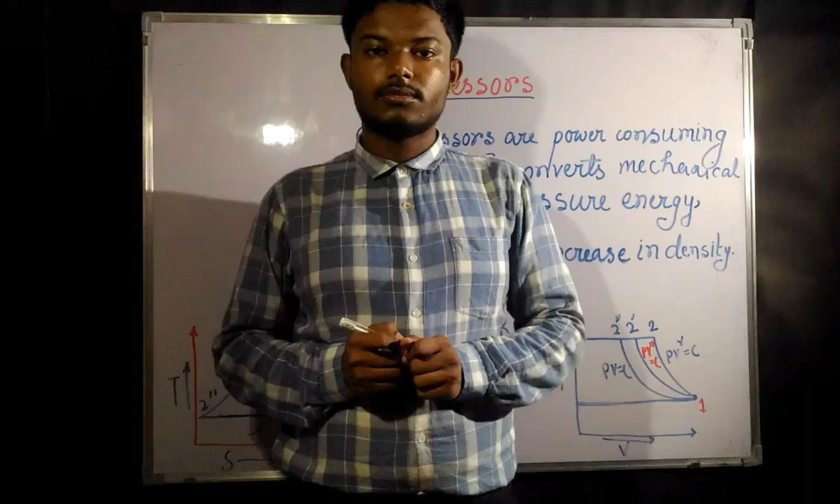In this lecture we are going to start compressors.

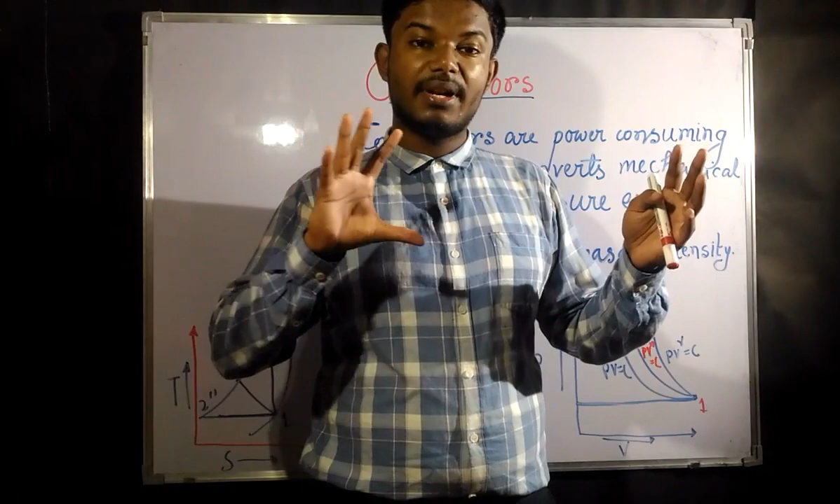So what is a compressor? Compressor is an open system device, a power consuming device which converts mechanical energy into pressure energy, with appreciable increase in density. So what does the compressor do? It compresses air or whatever substance with the help of mechanical energy, such that the volume is reducing, resulting in increasing density. Due to this forceful compression, the pressure energy gets raised. So such devices are known as compressors.

Now compressor is an open system device. If you remember the work done formula for open system devices, it goes like this: W open equals minus of integration of V into dP. This was the formula for our open system.

Now there are five possible ways, or five possible processes. What are these processes? They are constant pressure, constant volume, adiabatic, polytropic, and isothermal.

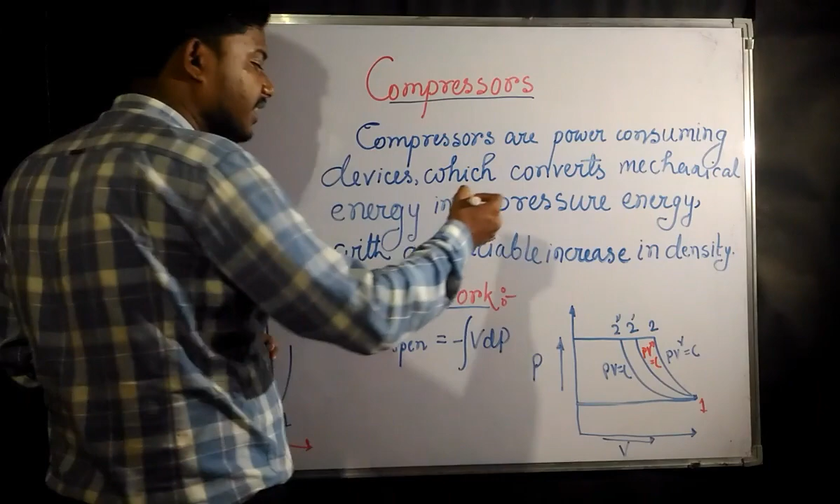There are five processes, but out of them you cannot go for the constant volume process, and you cannot go for the constant pressure process. Why? Because in the definition itself it is written that mechanical energy is converted into pressure energy, meaning there should be a rise of pressure during this process. So you cannot go for constant pressure process. If you go for constant pressure during compression, then the whole work would be in vain.

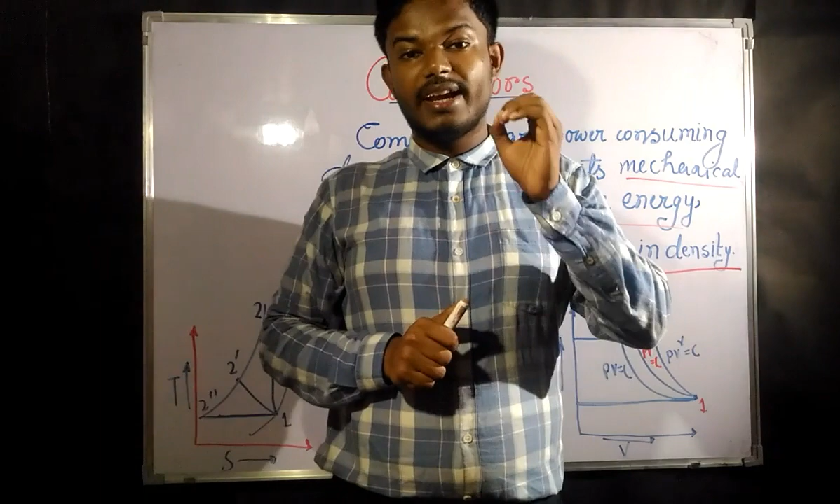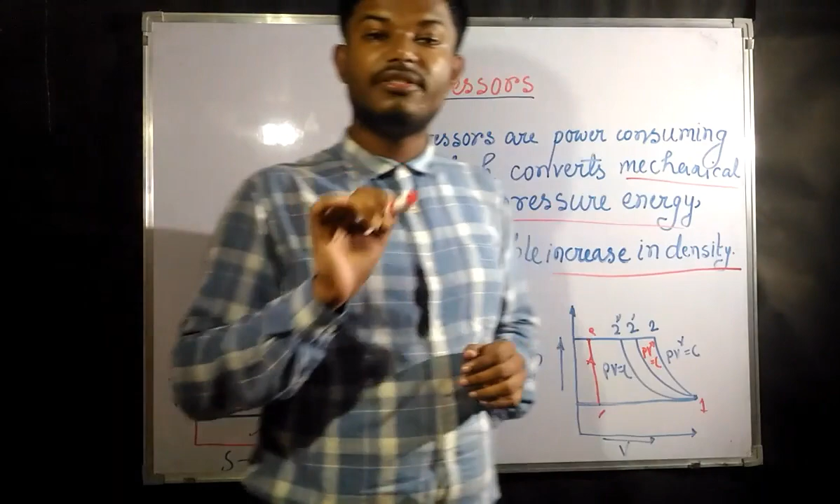Now the second thing is constant volume process. You cannot go for this either, because in constant volume process there would be no increase in density. If you do not decrease the volume, your density is not going to increase. By rising the temperature you can increase the pressure, but the density is not going to increase, so whenever it cools down, it will come back to its original pressure. From 1 to 2 you can rise the pressure this way, but that would be in vain, because if the temperature comes down, the pressure will also come down, and it is not going to increase the density.

So what are the remaining three processes? They are nothing but adiabatic, polytropic, and isothermal. From 1 to 2 is adiabatic process, from 1 to 2 dash is polytropic process, and from 1 to 2 double dash is isothermal process. Now, as we have seen earlier, let's look at how the slopes are going to be in case of these adiabatic, polytropic, and isothermal processes.

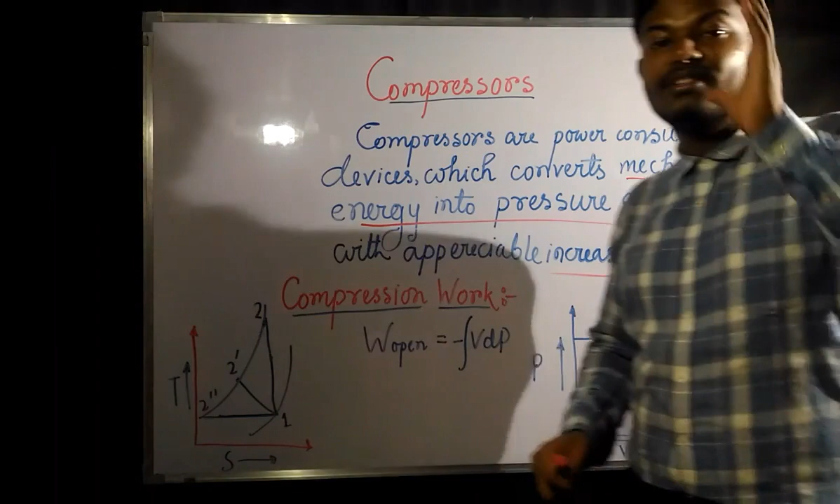Now you can see we have always said this for open system work. In closed system work, what happens? Whatever curve is there for closed system, if you project it onto the volume axis, then whatever area that is given, that is our work done by a closed process.

Okay, now in case of open system, this is going to be an open system. Compressor is an open system. So I have also said that for open system, what is the total work done, or how can we find the total work done from the diagram? It can be found if you project the curve. If you project the curve on pressure axis, for closed system you project it in volume axis, and for open system it is going to be projected on the pressure axis.

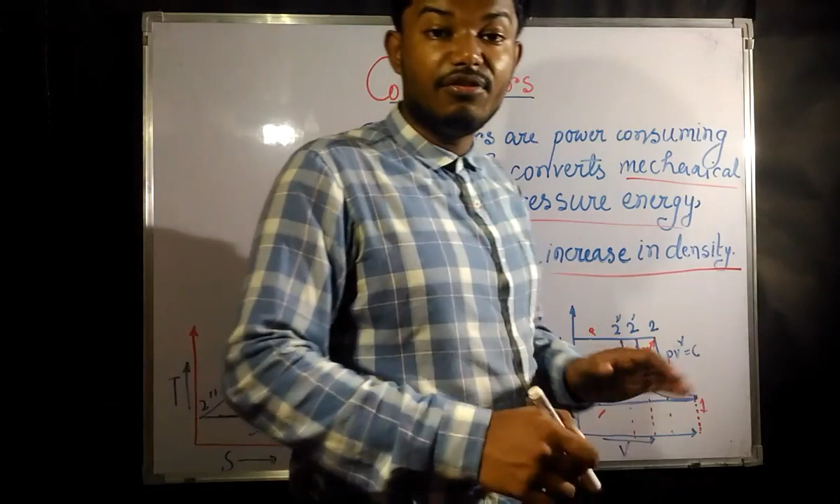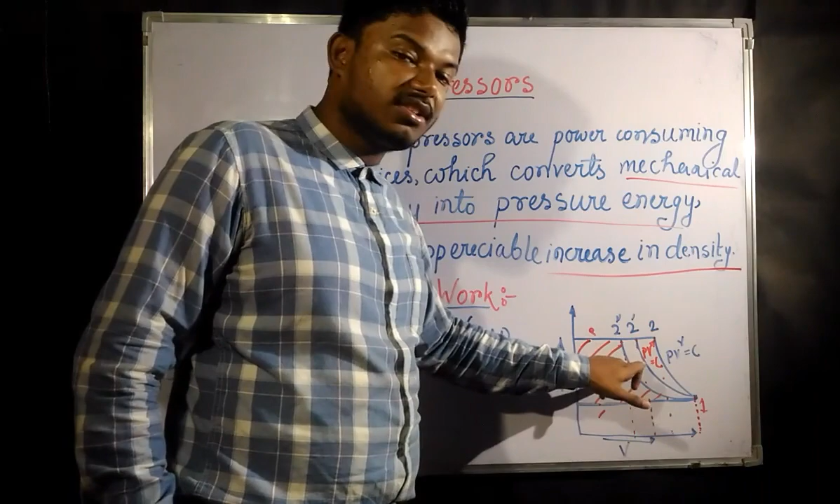Now if you project the slope on pressure axis, then whatever area it covers gives us the work done by the open system. So from this diagram you can easily say, this is adiabatic process from 1 to 2, 1 to 2 dash is polytropic, 1 to 2 double dash is isothermal. Now you can easily say, if you project each and every curve on the pressure axis, then which process is going to have the lower work done.

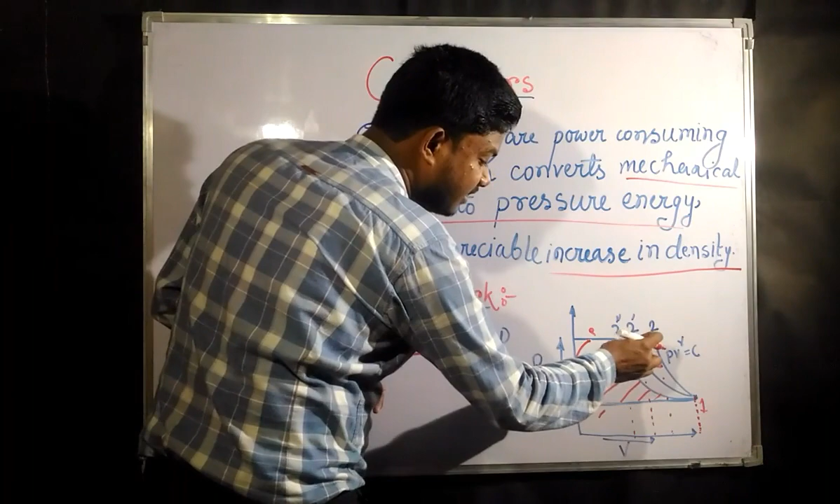Lower work consumed, or the amount of work interaction, which curve is going to give you the lowest amount of work interaction, that is only the 1 to 2 double dash. That means the isothermal process, 1 to 2 double dash is isothermal process. This is only going to give you the lowest amount, because if you go for 1 to 2 dash, this much of area is going to increase, and if you want to go for adiabatic process, then this much of area again going to increase.

So the lowest amount, this is compressor. So this is going to be work consuming device. That means the lowest amount of work that should be given to a compressor so that it can perform can only be possible in isothermal process. That means if you go for isothermal process, then only the work given to a compressor is going to be less. But we cannot go for isothermal process, as well as we cannot go for the adiabatic process also.

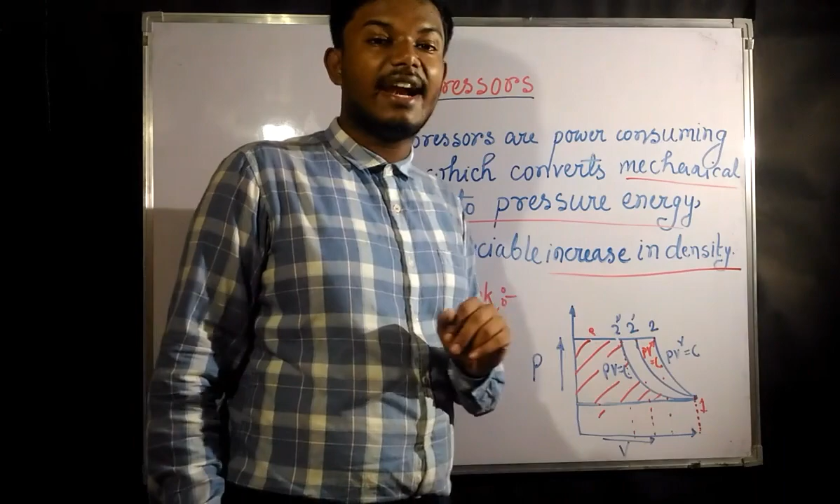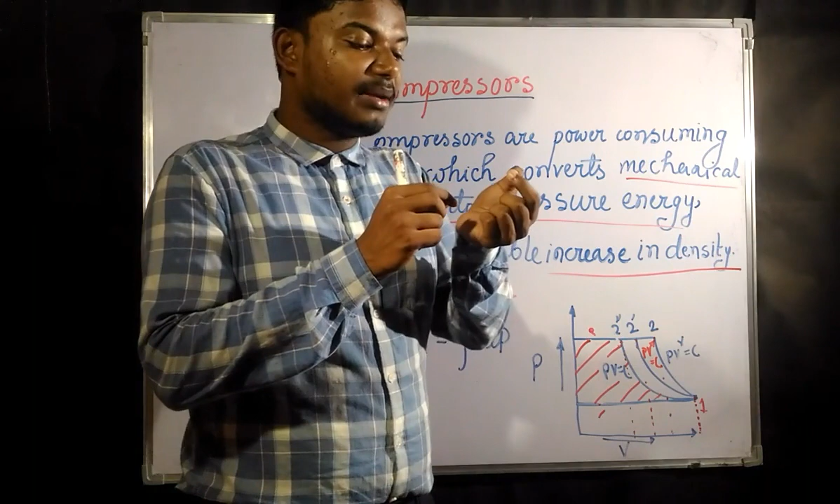Why? Because practically isothermal process is very slow process. Why is this slow process? Because if you give some heat, slight temperature difference would be there. Now you will have to wait for the temperature to come, that slight increase in temperature to come to its original position, then you are giving more heat. So that the temperature is again going to some extent, then again you will wait to take it to the original temperature. Then after that you are going to give it, then also some more increase in temperature will be there, then you will wait for it to come down to the same temperature, and like this your process will be going on.

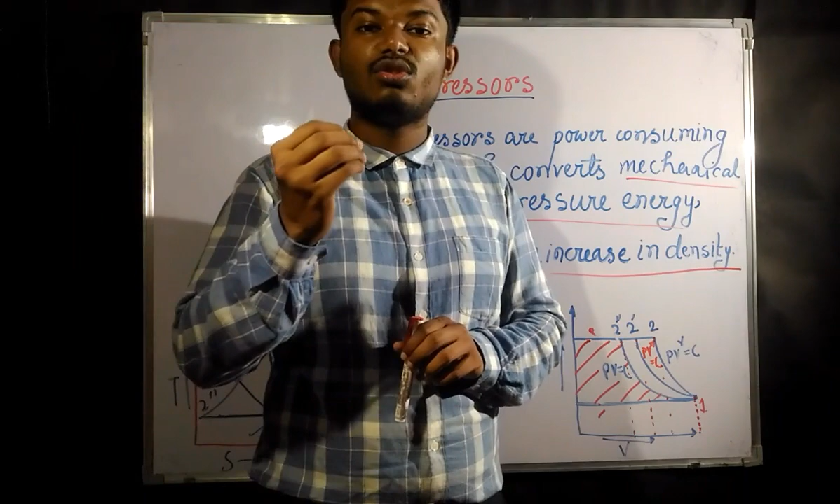So it is a very slow process. Isothermal process is very slow process, because you are constantly reminding that you are not allowed to increase the temperature. So for this reason we have to add the heat slowly, so this is going to be a very slow process. And in case of adiabatic process, what happens? Adiabatic process is a very fast process. You have to do the process in such a short time that it does not get the time to interact with the surrounding. If there is interaction with the surrounding, there must be some heat interaction.

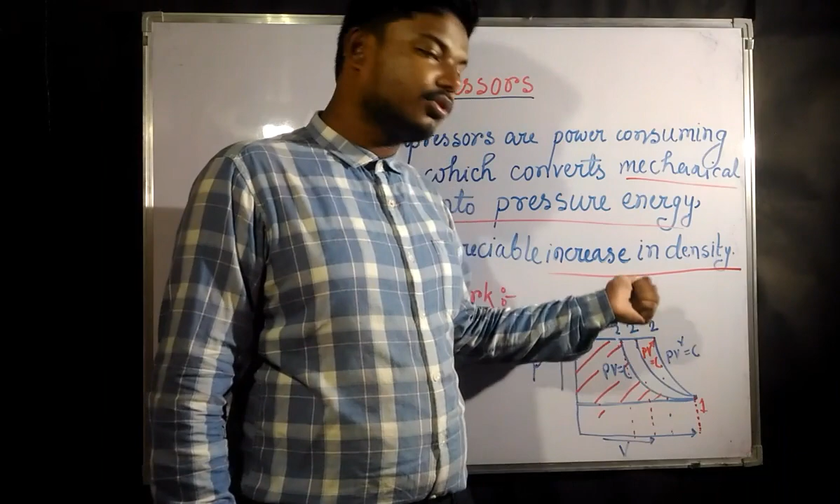So adiabatic process is a very fast process, and isothermal process is very slow process. So the only process that we are remaining with is going to be our polytropic process, and since this polytropic process lies between these two, this is neither very fast nor very slow. So only with polytropic process we can perform the compression process. So this is our three processes in PV diagram.

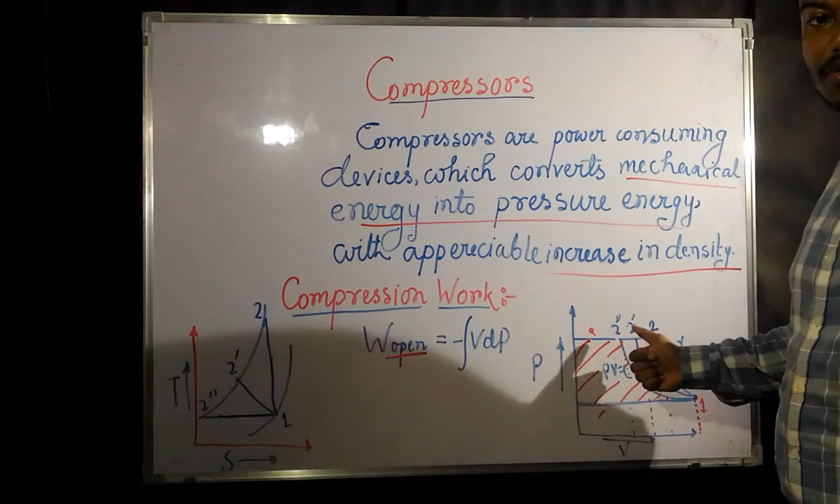Now coming to the TS diagram, or temperature entropy diagram. In this diagram, 1 to 2 is adiabatic process. That means adiabatic processes are always isentropic process. So here, keeping the entropy same, 1 to 2 it is getting compressed.

1 to 2 dash. 1 to 2 dash is what? 1 to 2 dash is polytropic process. And 1 to 2 double dash is what? Constant temperature process, or isothermal process. So 1 to 2 double dash is constant temperature process. So this is parallel to the entropy axis, and since this is isentropic, this is going to be parallel to the temperature axis. And in between them there is going to be the polytropic process.

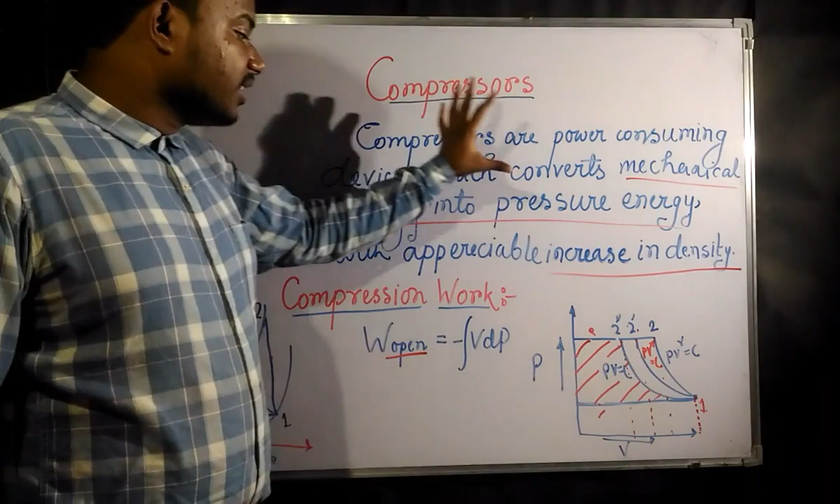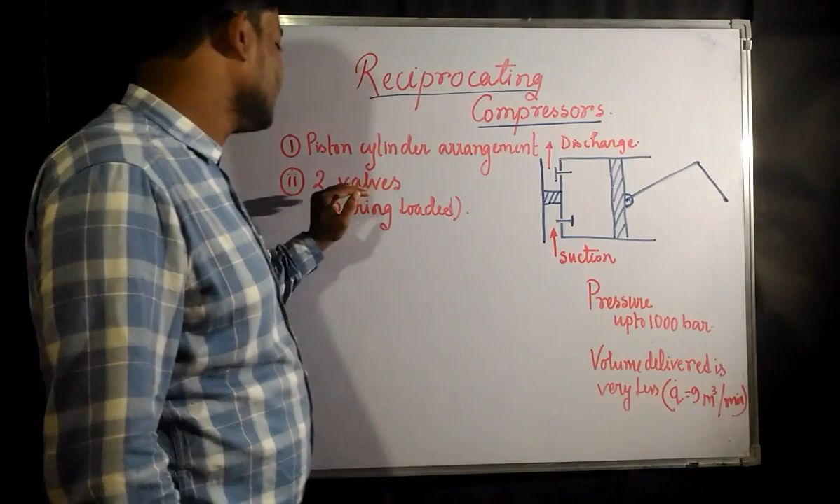Now it is constructed with two different parts. One is the piston cylinder arrangement. There must be one piston cylinder arrangement and there must be two valves, and these two valves are going to be spring loaded. Spring loaded means they open and close, connected with springs.

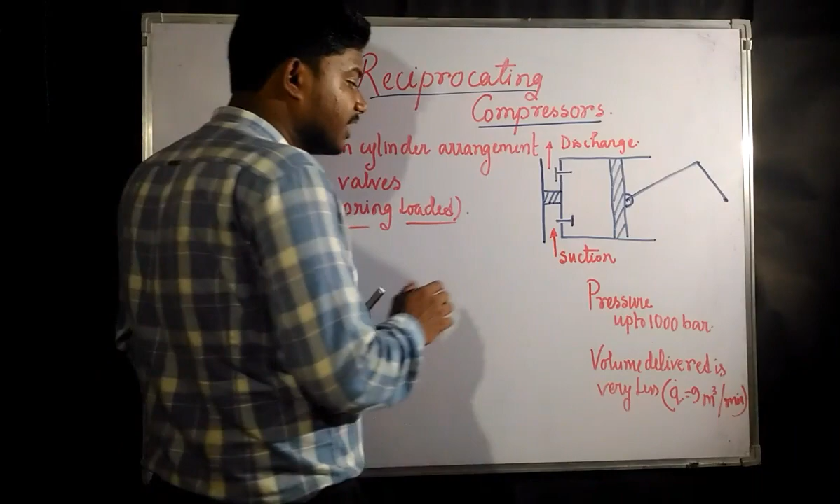Whenever there is a pressure difference across these valves, then only these valves are going to open or close. During suction, the piston is going to go towards the outside of the cylinder. That means there would be a suction created inside this cylinder. Now after the suction creation, this is open to air.

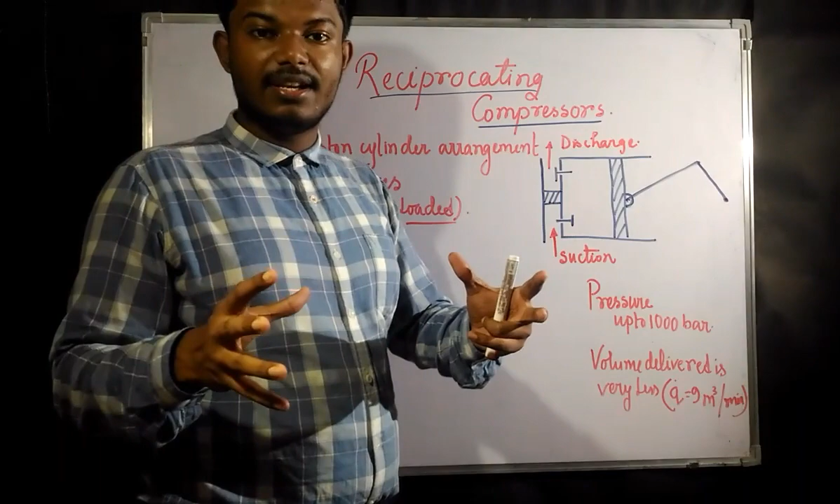This part is open to air, or whatever the gas we need to compress, at whatever pressure that gas is kept. Suppose we need to compress oxygen, and this oxygen is kept in a cylinder with direct connection to this suction pipe of the compressor. So whatever the pressure P0 is given here, that would be the pressure outside this valve, and inside this valve there would be one negative pressure.

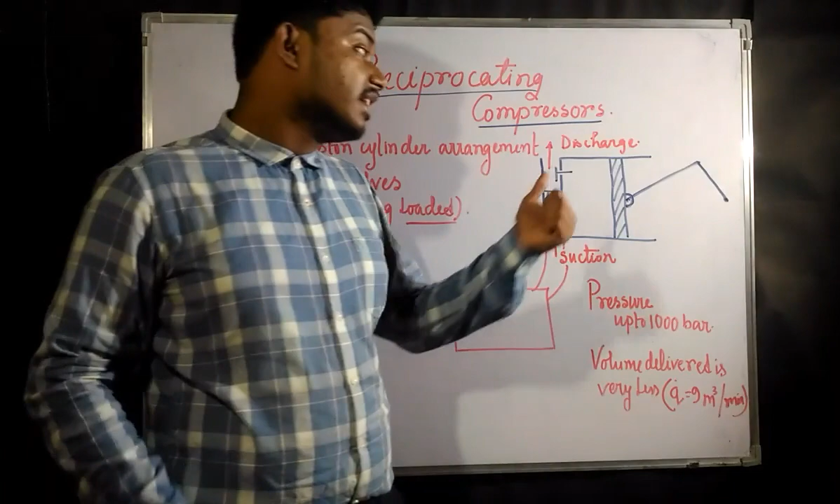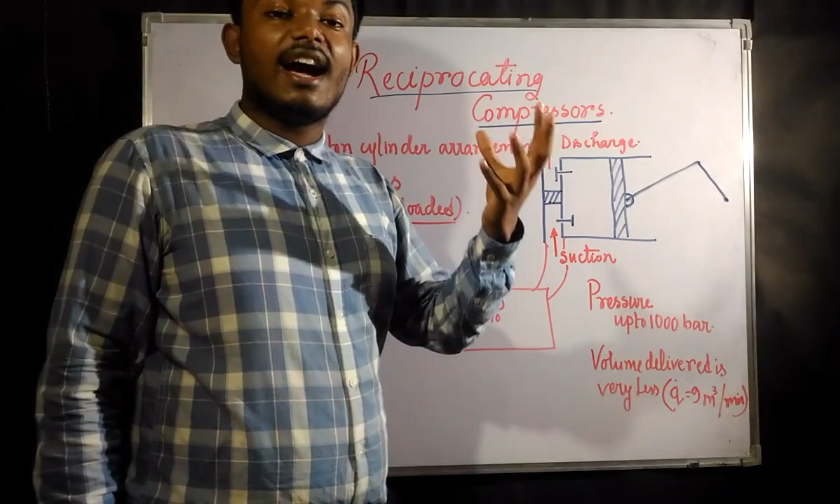Why negative pressure? Due to the movement of the piston towards the outside, if there was any clearance volume, whatever air was present inside that clearance volume was expanding. After expanding, what happens when a gas expands? Its pressure comes down. So after expanding to a certain limit, its pressure comes down to so less pressure that one vacuum, or negative pressure, or suction will be created here.

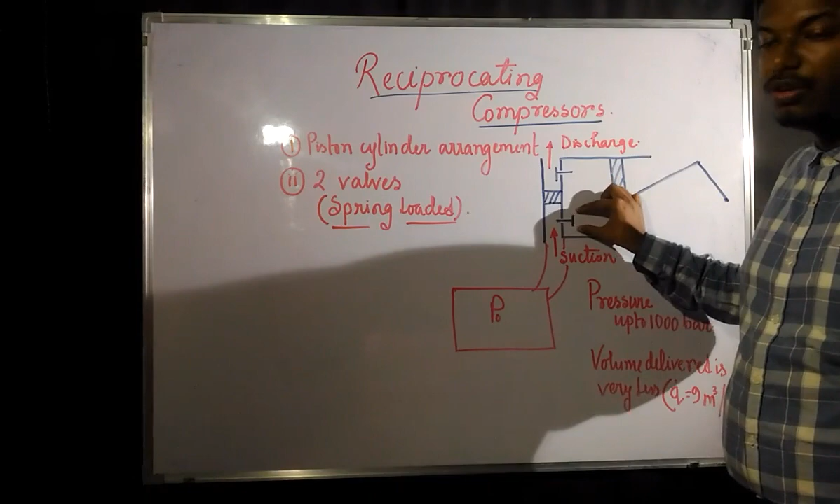So due to this negative pressure, the spring will open. Whatever negative work has been done by the pressure inside is going to be higher than the spring force, then only the valves are going to open. So the main basic thing is these valves work when there is some pressure difference across the valve. So due to the suction, whatever air we need to compress is going to go inside this cylinder.

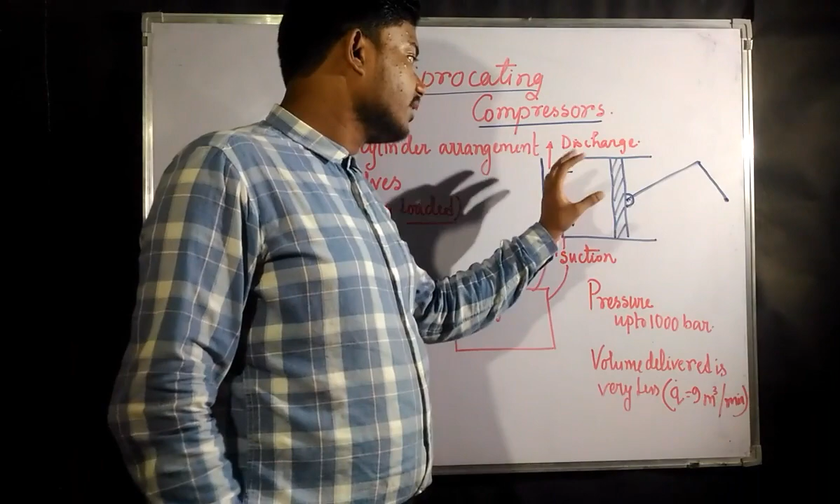And during the backward stroke, this valve is going to get closed. And whatever gas or air has been present inside this cylinder is going to get compressed. Now after compressing, the pressure is going to rise gradually. So with the backward stroke, the pressure is going to rise.

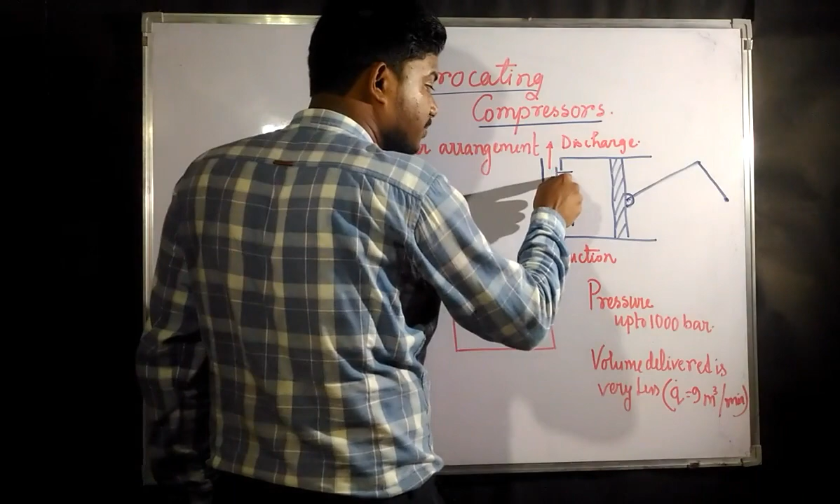So after some time it will attain such a pressure that the work done by that pressure would be higher than the spring force operating this valve. The pressure inside would be so high that the force due to this pressure will overcome the spring force of this valve.

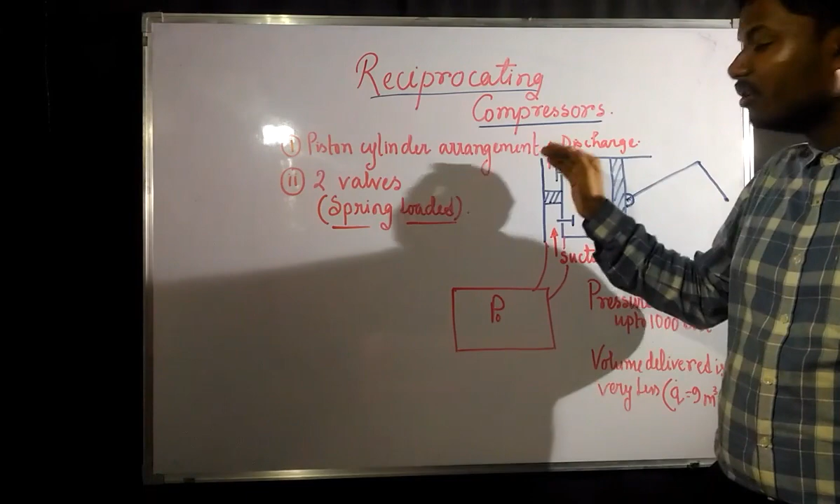So this valve will open now, and whatever compressed gas was there will get discharged, and it will be collected in some cylinder where we need to keep the compressed air. So this discharge will be from the layout of the reciprocating compressor. Discharge will be from the compressor, but it will be collected somewhere so that we can use it for later use.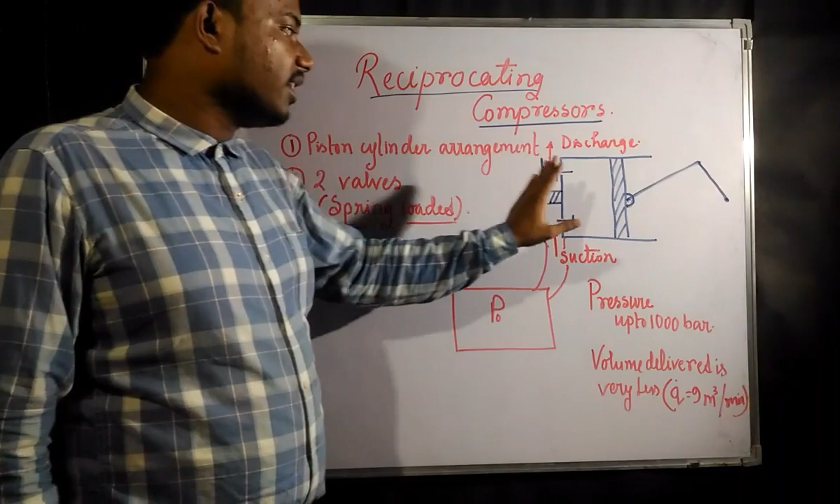So this is going to be the reciprocating compressor working principle. With the forward stroke, it is going to suck the air or gas which we need to compress, and due to the backward stroke it is going to compress it more, so that this valve opens, and with the discharge it is going to be collected to some other part where we can use this for later use, or we can directly use this air.

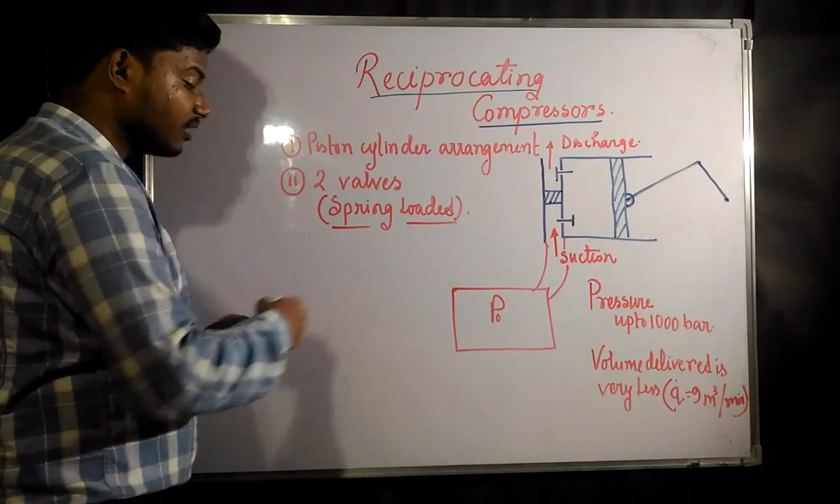Wherever we need compressed air, we can directly use it, suppose in case of refrigeration or air conditioning. So you have seen the layout - after the compressor it directly goes to the condenser for refrigeration. Similarly, for work producing cycles also, after the compressor there is a heat addition process. Either you can use the discharge directly, or we can store it so that we can use it later.

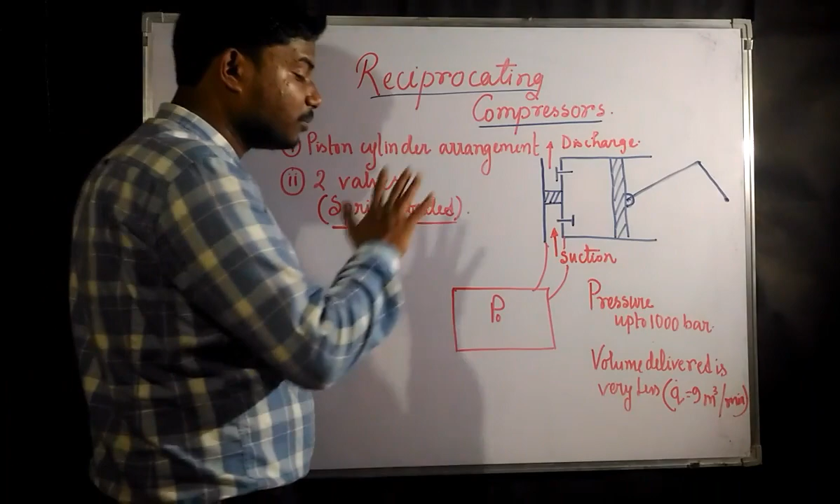A reciprocating compressor can compress up to 1000 bar, but the process would be very slow because the volume delivered is going to be very less - likely 9 meter cube per minute. Per minute it is going to compress only 9 meter cube, but the pressure would be appreciably high.

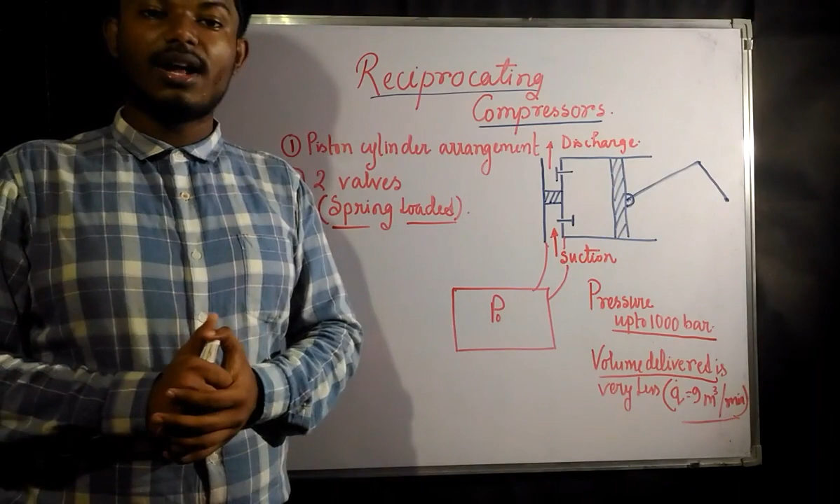So this is going to be a reciprocating compressor, and now we will see what is the work input required for reciprocating compressors - specifically the work input required by the compressor which is considered without clearance volume.

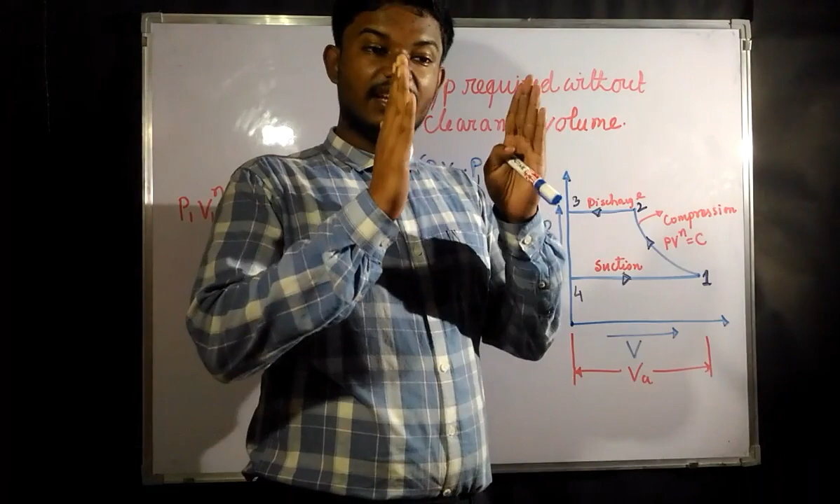Suppose there is a reciprocating compressor with no clearance volume. In that case, what is the total work required? Since this is a cylinder with no clearance volume, the initial position before suction means the volume is going to be at 0 position before the suction starts. If there is no clearance volume, the piston will be stuck to the cylinder head, so the volume enclosed by the cylinder and piston is complete 0, starting from 0.

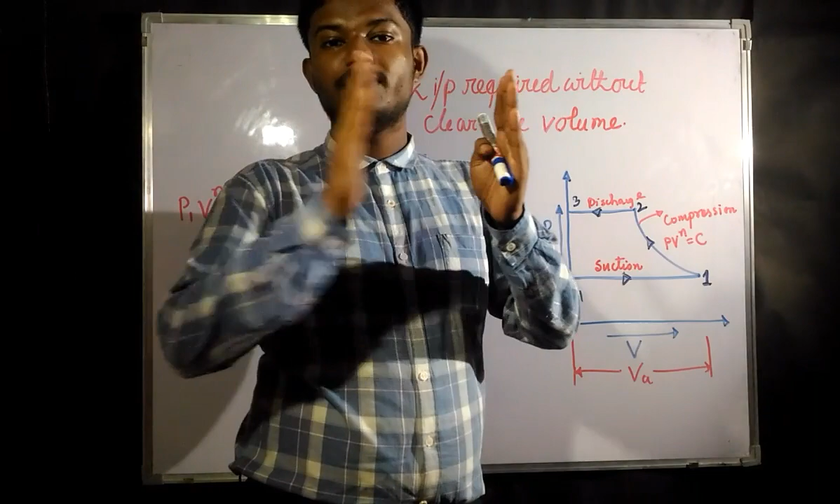Then the suction stroke happens. With the suction stroke, the volume attained is the total length by which the piston moves multiplied by the cross sectional area of the cylinder. This gives the total volume attained due to suction. So this 4 to 1, or 0 to 1, is going to be the suction process. During this suction process it takes a certain volume of air.

Suppose we are compressing air now, from the atmosphere. During this suction, this much is the amount of volume achieved. Let us say this total volume is VA, or volume of air. Now after that, from 1 to 2, what is happening?

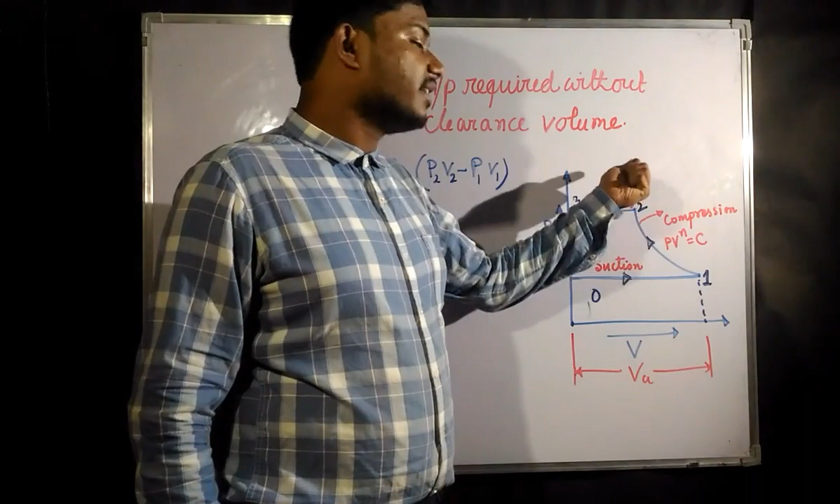This is getting compressed - the compression stroke. So up to some portion it is going to be a compression stroke where it gets compressed polytropically, up to point 2. Since point 2 is reached, the pressure inside the cylinder is so high that it is going to open the exit valve.

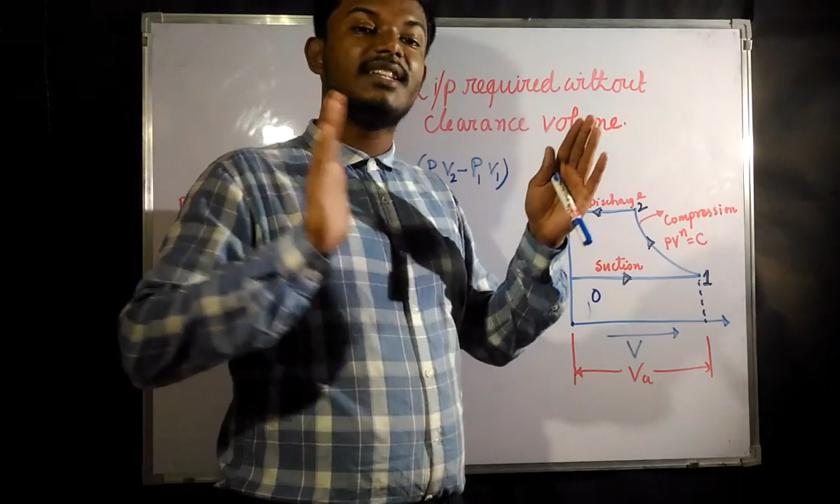After that, from 2 to 3, the discharge would be there, and the volume again comes to point 2, but up to the end of the discharge the pressure was higher - this is pressure 2, the higher pressure. We are compressing it from pressure 1 to pressure 2 by this compression stroke. So before the discharge of the whole thing, this is going to have a pressure of P2.

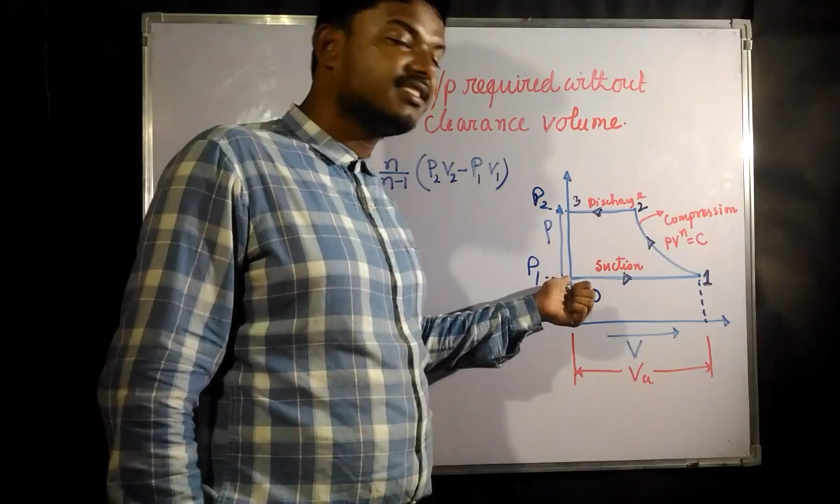Again when the suction starts, it comes at the atmospheric pressure, or whatever pressure the air is present at, and in this way it continues to take place. Now what is going to be the work done by an open system? The compressor is going to be an open system because mass interaction would be there.

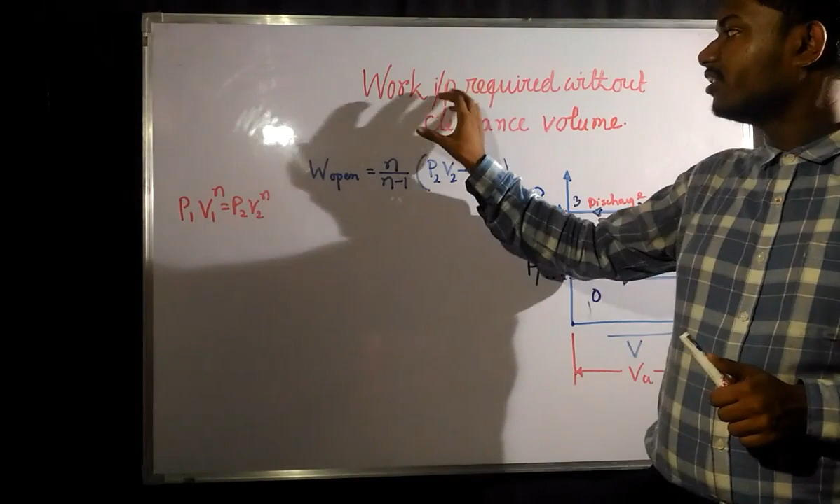Okay, so if you remember, for polytropic process, this was the formulation for work done by or work consumed. This is the work interaction formula for polytropic process. Now this is generally P1V1 minus P2V2, but here it is P2V2 minus P1V1 because this is work input required, not the work given to us. So since we are giving this work, it is going to be negative, hence P2V2 minus P1V1 instead of P1V1 minus P2V2.

Now if you rewrite this, let us take P1V1 common. So if you take P1V1 common, you are going to get P2 into V2 divided by P1 into V1, minus 1. So this is going to be your expression.

Now let's see what is going to be the value of V2 by V1. Polytropic process is like this: P1V1 to the power n is constant. So before compression this is the expression P1V1 to the power n, and after compression it is P2V2 to the power n. So from here, to find V2 by V1, it would be P1 by P2 to the power 1 by n. This is going to be your value of V2 by V1.

So if you replace this with the value we have got, it is going to be P2 by P1, and V2 by V1 is nothing but P1 by P2 to the power 1 by n, minus 1. Now this is P1 by P2 to the power 1 by n, and this is P2 by P1, so we can also write this as P1 by P2 to the power minus 1. So now this P1 by P2 to the power minus 1 and P1 by P2 to the power 1 by n is going to get simplified.

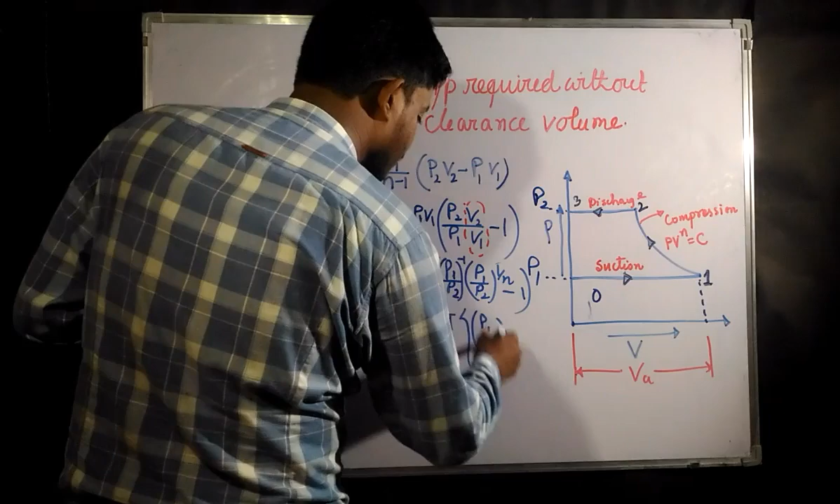Now there is going to be P1 by P2, and the powers are going to get added. So what would be there? 1 by n minus 1. This is minus 1 and this is 1 by n, so this is going to be the case minus 1. Okay, so this is the expression for the work required for a compressor without the clearance volume. If we are not considering the clearance volume, then this would be the case.

So you can rewrite it as MA into R into T and P2 by P1 to the power n minus 1 by n, minus 1. Then this is going to be your final formula for the work input required by a compressor which is not having any clearance volume. So this is going to be the formula.

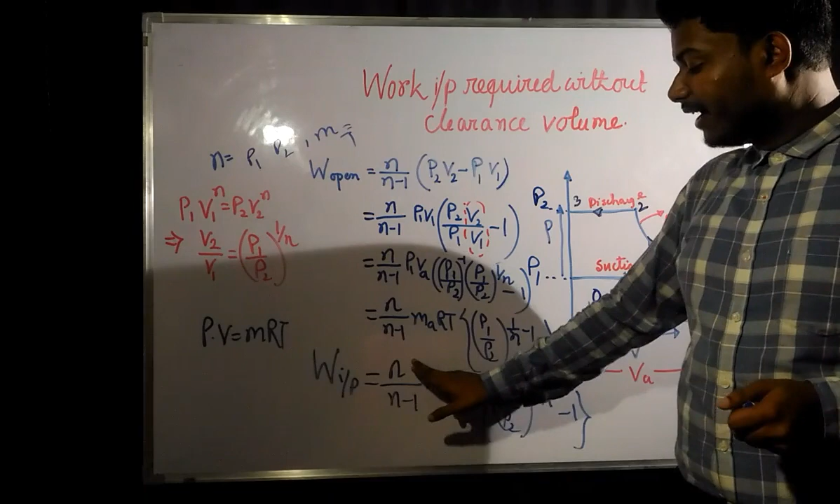So in some cases we are directly asked to find this, the polytropic index n will be given. They will say we require to compress air from this pressure to this pressure, meaning P1 and P2 are given, and the mass would be given. So what are the things they will give? N they will give, P1 they will give, P2 they will give, mass they will give, and the temperature also. R you know for air, N is given, P1 P2 given, T given - that T would be T1, because since we are considering P1VA, we are considering pressure and volume at that point, so MA R T1 would be there - temperature at point 1. Mass of air is going to be constant.

Okay, after the compression starts, after the closing of the inlet valve, so here the inlet valve closes. In this place the air inlet valve is going to get closed, and up to point 2 the exit valve is also getting closed. After point 2 the exit valve is going to get opened.

So from 1 to 2 the mass is going to be constant, that is the total mass of air, only the volume is going to get decreased. R is there, T1 is there, so you can write in place of this R, MA into R into T1. T1 is the temperature at this point. Since we are taking the pressure and volume at point 1, this would be the formula for work input for a compressor without the clearance volume.

So now we are going to see what is the work input required for a reciprocating compressor, but now with clearance volume. So now we are going to consider the clearance volume.

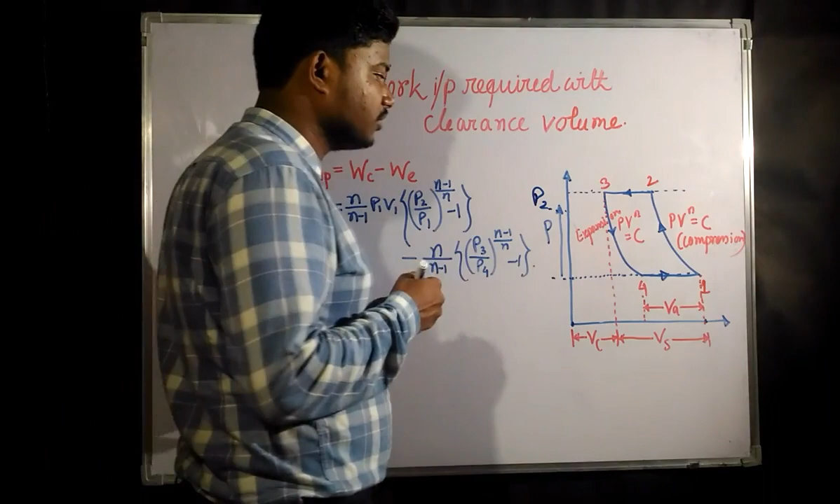Now up to point 3 it is going to be the clearance volume. Point 3, this is going to be the clearance volume, and this is going to be the suction or the swept volume. That means from here to here the piston is going to move. Now what happens, this is going to be the clearance volume, so this much is the clearance volume.

That means in this clearance volume this much volume of air is already there. This much volume of air is already present inside the cylinder before even the stroke starts, or the suction stroke starts. There is a certain amount of air, this much amount is there.

Now from this point up to this point there is the air, so when the suction stroke starts, the swept volume is this, piston will start from this volume. So the piston will start from this volume. Before reaching point 4, the air inside, which is trapped inside the clearance volume, some air is trapped inside the clearance volume.

So up to point 4 what is happening, the trapped air is going to expand. That trapped air is going to expand, so with the expansion the pressure is now falling down. So whatever air, this VC amount of air or this VC volume of air is expanding up to volume 4, this is expanding up to V4.

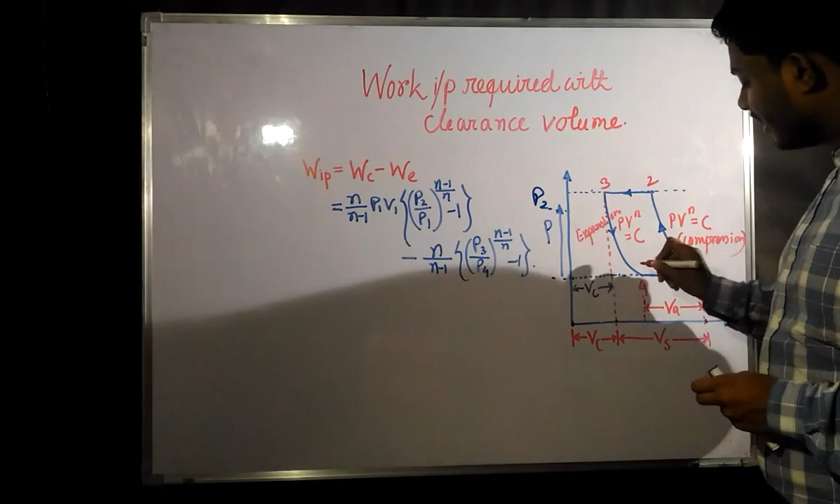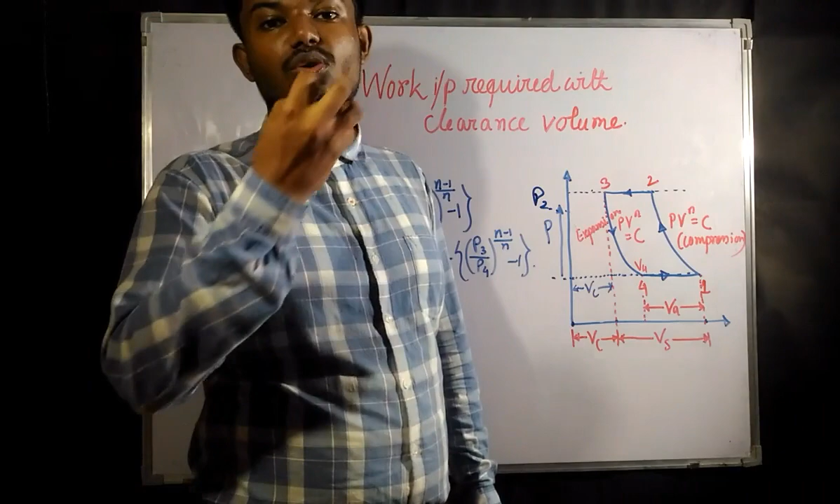So after expanding up to V4, the pressure inside the cylinder has now become negative, or you can say the suction pressure has been created, or the suction has been created. So after reaching point 4 it will go to point 1. So whatever stroke is there from point 4 to 1, that is going to be the total suction.

But in case of the previous part, where we did not consider the clearance volume, the whole stroke was the volume of air. During the whole stroke the air was going to go inside the cylinder. Why? Because there was no air inside that cylinder so that it could expand, since there was no clearance volume.

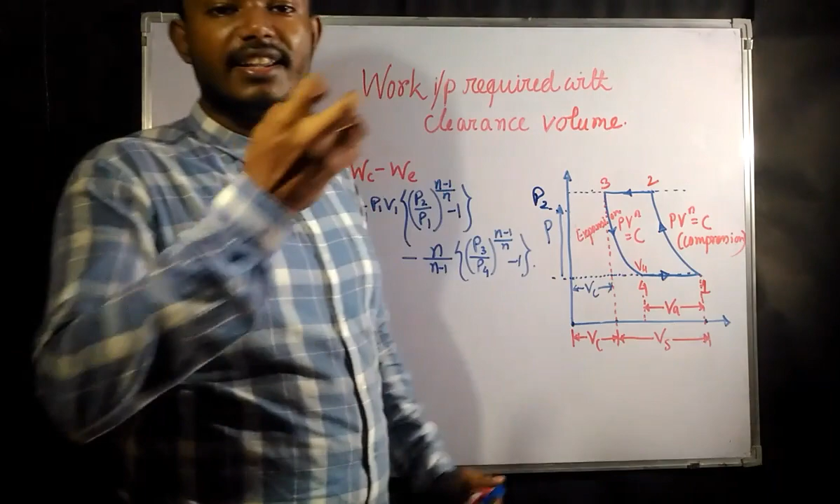Now here is one clearance volume. That means for this clearance volume it is expanding up to point 4. So after reaching point 4, the remaining stroke is going to suck in the air. So what we can say, if we consider it with clearance volume, the volume of air that is sucked into the cylinder is going to be less.

So from point 4 when the stroke starts, this is going to be the volume of air. Previously the volume of air was from here to here, because of the absence of air in the clearance volume. Now up to point 4 it is going to expand, then only the suction will start. Then whatever volume is covered by the stroke after point 4 is going to be the total volume of air.

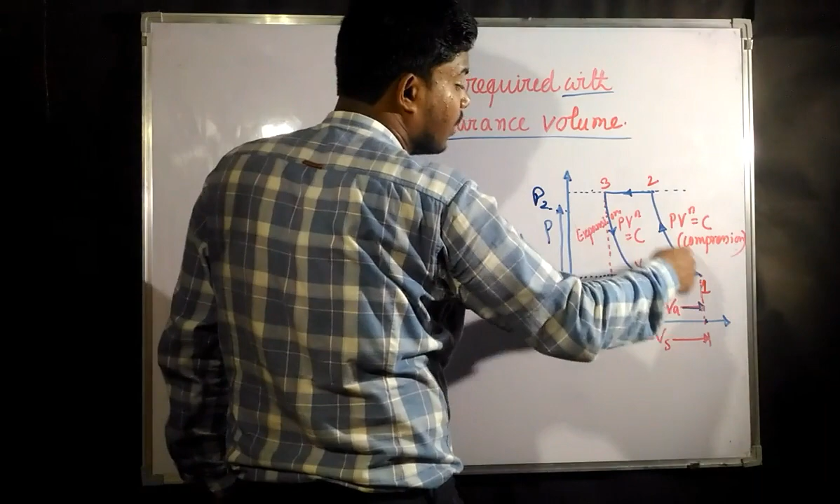So after that, 1 to 2 it is going to get compressed again, polytropically. Again 2 to 3 it is going to discharge, it is going to get discharged. So discharge means it is going up to volume 3 now.

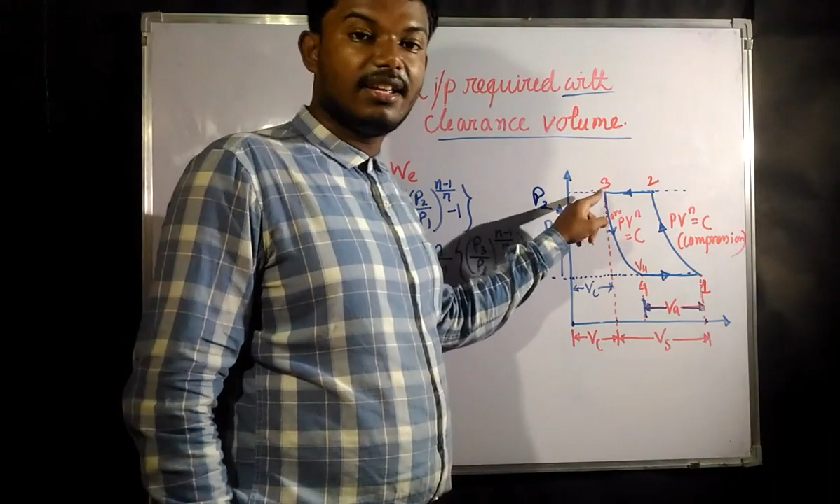So after reaching volume 3, that means after reaching the clearance volume, whatever air has been present inside the cylinder, this amount of clearance volume is filled with compressed air. So what is happening is it is going to get compressed, that means after compression up to point 2, 2 to 3 is going to get discharged.

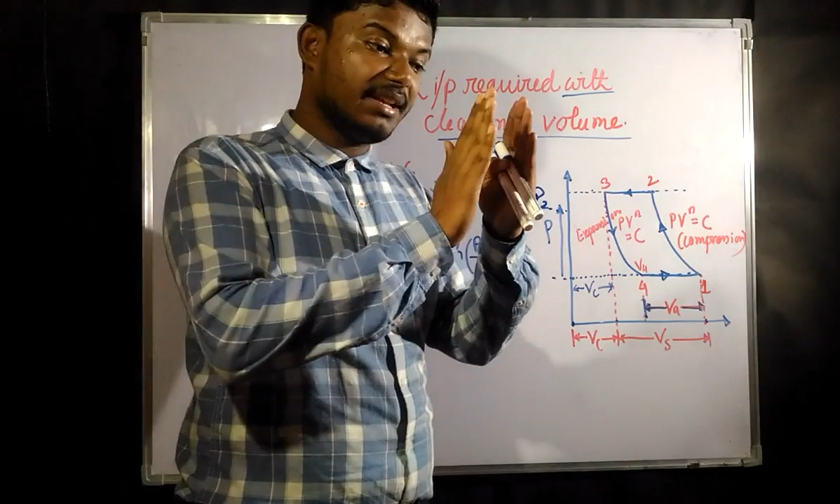So after discharging, what will happen? At some point the piston is going to stop. Where will it stop? Whenever the volume inside the cylinder becomes the clearance volume, that means the piston is going to stop now.

That means inside this clearance volume, there would be some compressed gas that has been compressed in the previous stroke. That amount of compressed air is now trapped inside the clearance volume.

Again, when the suction stroke starts from 3 to 4, whatever compressed air has been trapped inside the cylinder is going to expand again, up to point 4. After reaching point 4, it is going to get negative pressure, and then the volume of air will go into the cylinder.

So from this diagram, this is going to be the volume of air that has been taken, unlike the previous one where the whole suction stroke was the volume of air.

Now what is going to be the work input required? Work input required is whatever this compressed gas, after reaching this point, is going to do some work. It is going to expand the cylinder by itself, since it is compressed, up to some point.

That means there would be a compression work required during compression, 1 to 2. There is one work required for compression, minus WE. WE is the work that has been done by the compressed gas during the expansion.

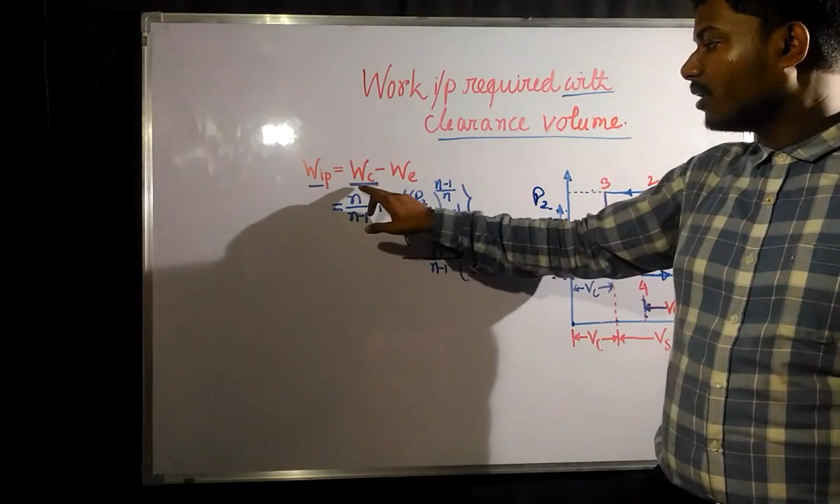Similarly, for expansion it would be like this only: higher pressure by lower pressure. Here also it will be higher pressure by lower pressure, because P3 is higher, P4 is lower, to the power n minus 1 by n. So this is going to be the work done due to expansion.

Now in the previous case we had written this as VA, meaning volume of air. Now we cannot write this because volume 1 is not going to be VA. VA is only this much. From here, VA is going to be V1 minus V4, that is the volume of air.

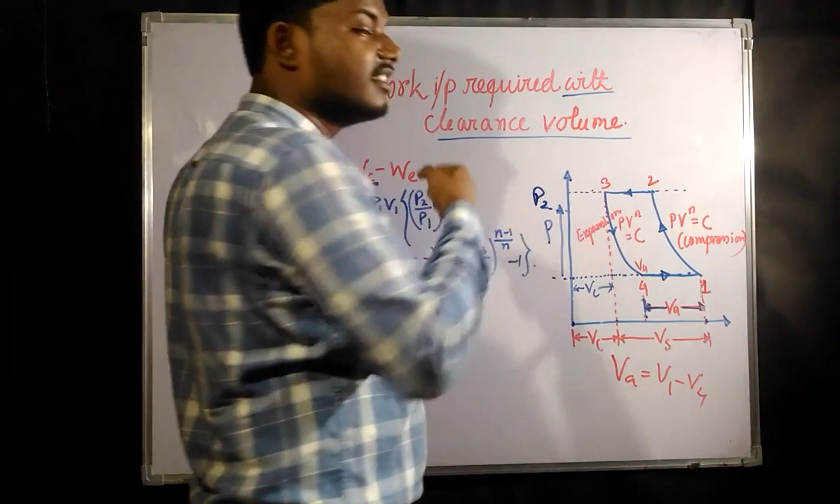Now if you simplify this, you will know that P2 is equal to P3, because the discharge happens in a constant pressure process. 2 to 3 is a constant pressure line, parallel to the volume axis, so P2 is going to be P3. And again P4 is going to be equal to P1.

So now if you simplify this, what is going to happen? P2 is going to be equal to P3, so you can directly write P3 equals P2.

Okay, P1 is equal to P4, so you can directly write P4 is equal to P1. We are rewriting this, so from here you can see n minus 1, P2 by P1 to the power n minus 1 by n, and from here also this is going to get common. Sorry, here one term is missing, the term would be n by n minus 1 into P4 V4. This term is missing here, so this would be the case.

This is similarly like this only, here also the before compression, so here the term should be the lower pressure and higher volume. Similarly here also it will be lower pressure and higher volume during the expansion. During the expansion lower pressure and higher volume, during the compression lower pressure and higher volume. So this was missed. So from here what you can say,

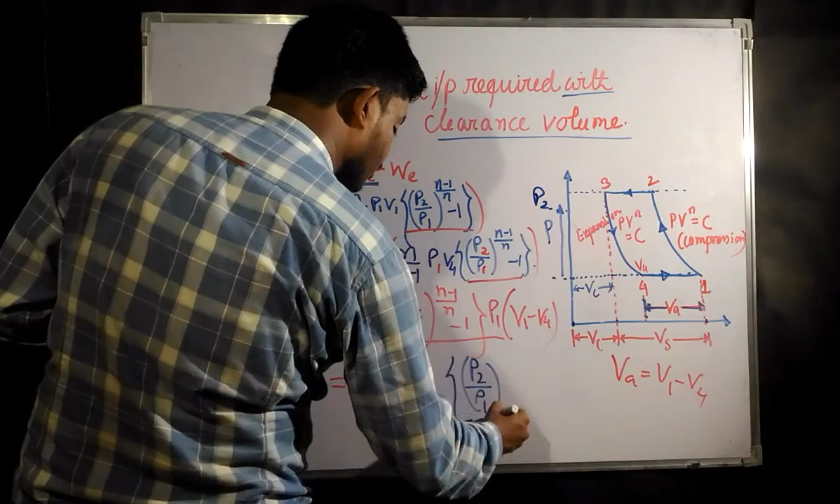So from here you can again write n by n minus 1. Now V1 minus V4 is what? V1 minus V4 is going to be your volume of air, so you can write P1 into volume of air, and what is going to be in the bracket? It is going to be P2 by P1 to the power n minus 1 by n minus 1. This is going to be the expression.

So after that we can also rewrite this. So VA is what? Total volume of air, you can write it as MA into RT. P1 into VA, you can write MA into R into T. So after writing that, what would be the final expression? The final expression would be n by n minus 1, MA into R into T1, here it would be T1, and this is going to be P2 by P1 to the power n minus 1 by n minus 1.

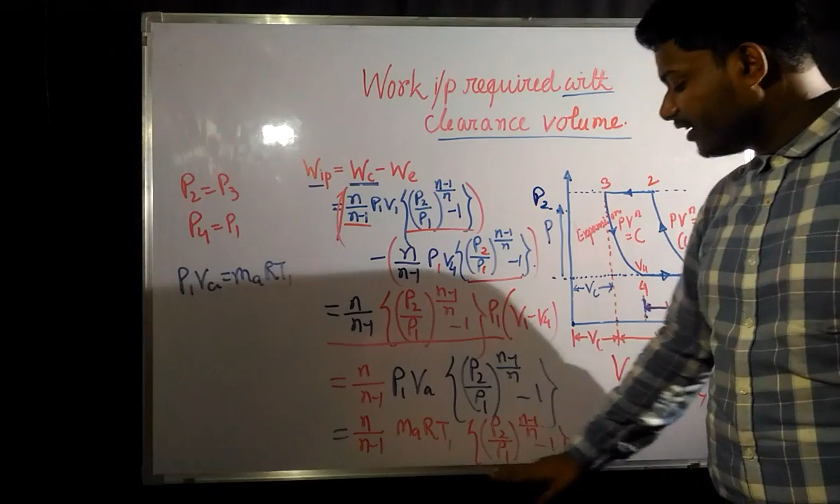So this is going to be the final expression for what is the work input required for compressor with the clearance volume. But if you see, it is going to be same as that of whatever the work input that was required for a cylinder, for a compressor which was with the clearance volume or without the clearance volume. So this expression is same for both with clearance volume and without clearance volume. So we can say that the clearance volume does not affect much in whatever work that is required for us to compress a certain volume of air, the clearance volume does not play any role. Whether we take it with clearance volume or without clearance volume, the work input required is going to be same.

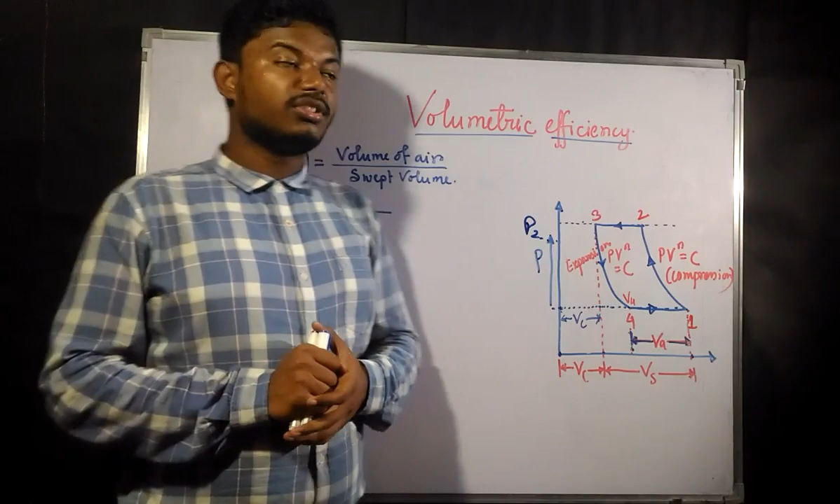So now we are going to see the volumetric efficiency. What is going to be the volumetric efficiency? Volumetric efficiency is nothing but the ratio of volume of air, meaning what is the volume of air that has been sucked into the cylinder, to the swept volume. What is swept volume? Swept volume is the amount of volume that has been covered by the piston during its movement, that means the cross-sectional area of the piston has covered a total volume during its stroke length. That amount of volume is known as swept volume. Now the ratio of the total amount of air sucked in by that swept volume is known as the volumetric efficiency.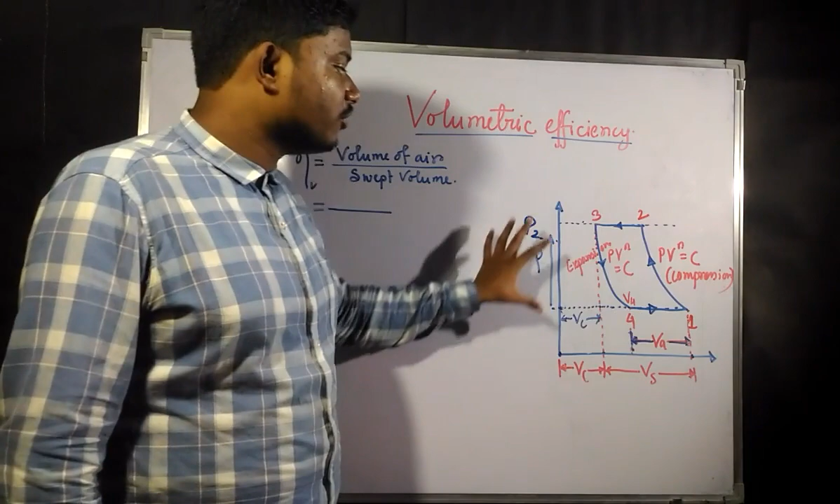Now this is the diagram for a compressor where we have considered the clearance volume. Now for a moment let us consider a cylinder where there is no clearance volume. In such cases where there was no clearance volume, your suction used to start from here. Now your suction is going to start from here, where there is no clearance volume, your suction used to start from here.

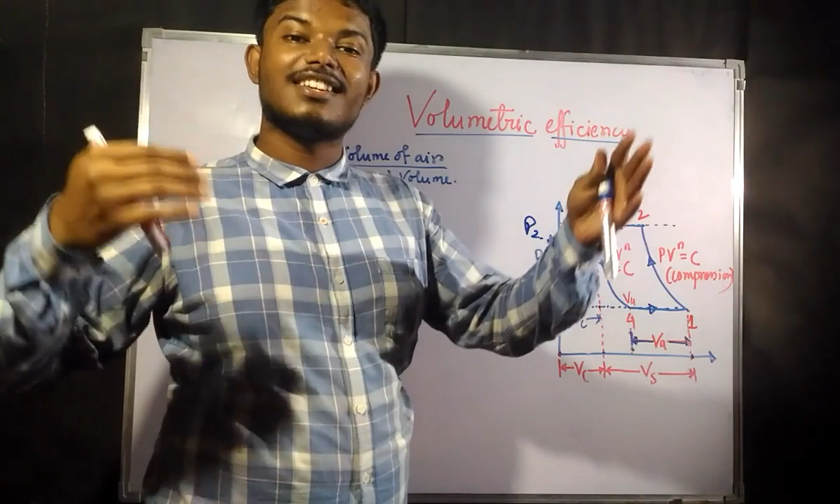Okay, and your clearance volume was 0. Whatever the suction volume was there, the total suction volume was covered with air. So in that case, this was the case of volumetric efficiency. But in that case, where we did not consider the clearance volume, VA is equal to VS. That total suction volume is going to take in that much amount of air only. So VA was equal to VS.

So if you think that VS is going to give you 100%, that means what? That is not possible. That is not at all possible. That means it is not possible to create a cylinder without a clearance volume. Slightest amount of clearance volume would be there, and slightest amount of air would also be present there, trapped there.

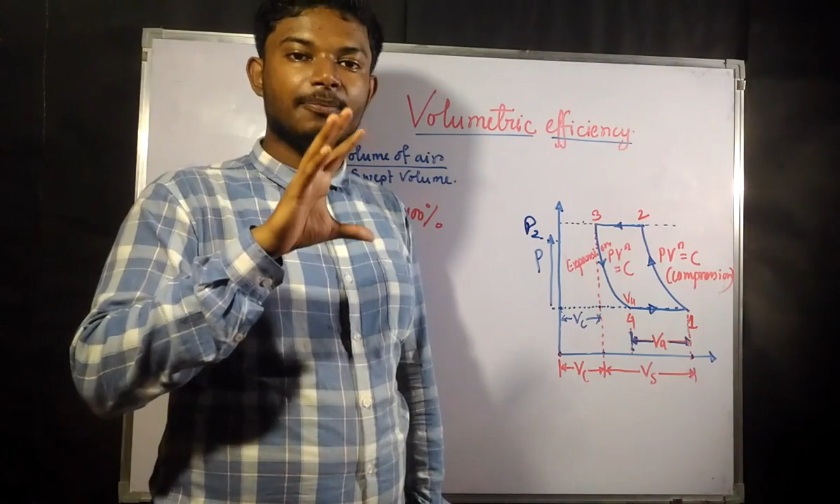So volumetric efficiency, or you can say that the compressor which you have considered without the clearance volume, is not possible to construct. It's not possible to construct. So that means what? With the increase of the, now this is going to be 100%, but actually it is not 100%. That means what? In compressors like this, there is always some volume of air present.

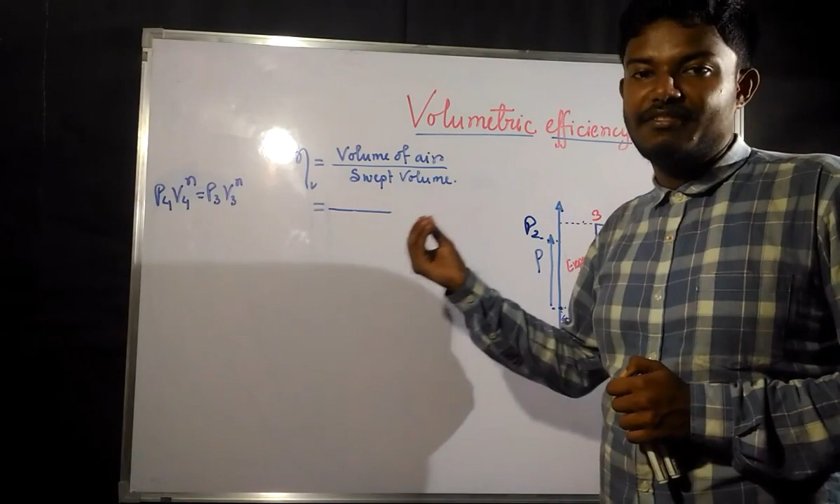There is always some volume of air present. That means that volume of air is going to hamper the efficiency. With the increase of the clearance volume, there would be the decrease in the volumetric efficiency. That is the reason now we are considering the volumetric efficiency, where the volumetric efficiency cannot be 100%. Now let us take this case.

In this case, what is going to be the volumetric efficiency? This is going to be VA by Vs. Now VA is what? VA is nothing but V1 minus V4 is going to give you VA, and this is going to be Vs. Now if you see, V1 is again divided into two parts, Vc and Vs.

V1 is again divided into two parts, Vc and Vs. So in place of V1 you can write Vc plus Vs minus V4, divided by Vs. Now from this you can also write, Vs by Vs is going to get cancelled out, plus Vc by Vs is there, and minus V4 by Vs is there.

Now this is known as, C is known as the clearance ratio, which is the ratio of clearance volume divided by swept volume. This is known as our clearance ratio. So in this place we can write C. That means what? We can write 1 plus C. Vc by Vs is known as the clearance ratio.

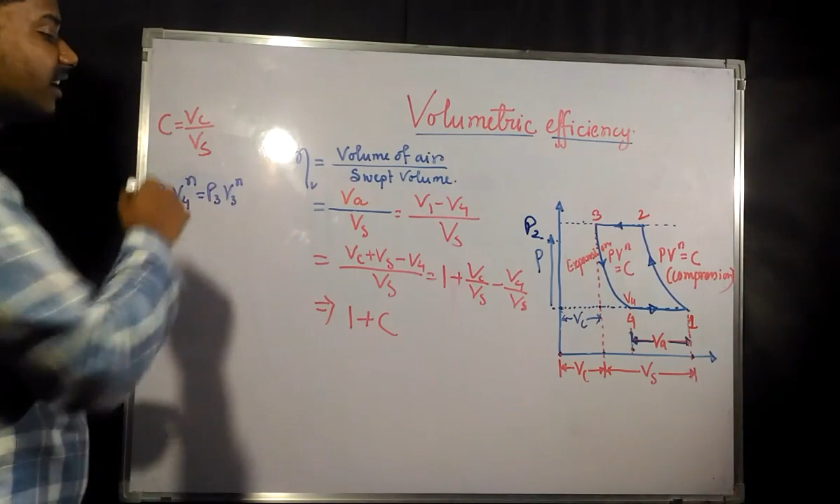So from here we can also write it as Vc by Vc. So after writing Vc by Vs, that means if you can take this, Vc by Vs is nothing but C. So up to here it is written 1 plus C. So you can write minus of C now. Vc by Vs is going to be C, and the remaining thing is V4 by Vc. So you can write here it as V4 by Vc. This Vc by Vs is going to give you C, and V4 by Vc is written here.

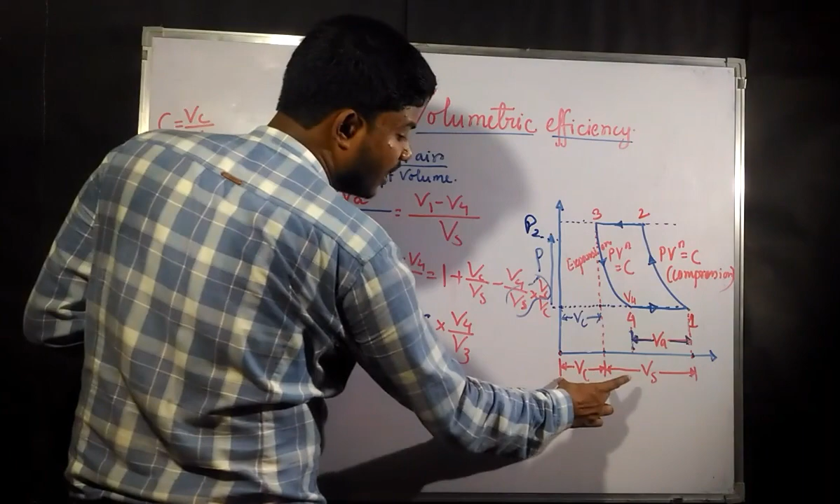Now you can see V3 and Vc are going to have the same volume. That means amount of Vc and amount of V3 is going to be same. So in place of Vc we are writing V3. So the expression is nothing but 1 plus C minus C into V4 by V3, which is going to be your expression.

Now let us take this process, the expansion process from 3 to 4. So from here you can see that P4 V4 to the power n is going to be equal to P3 V3 to the power n. Now we are going to find what is going to be the value of V4 by V3. So if you want to find V4 by V3, it is going to be P3 by P4 to the power 1/n.

Now again you can see that P3 and P2 are same. So in place of P3 you can write P2, and P4 and P1 are also same. So in place of P4 you can write P1.

Okay, so what is the final expression? You can write from here V4 by V3 is going to be equal to P2 by P1 to the power 1 by n. Okay, so this is the value of V4 by V3.

Now let us put it there. After putting it there, what would it be? 1 plus C minus C into P2 by P1, to the power 1 by n. Now from here you can take minus C common. If you write it as 1 minus C, the common thing would be P2 by P1 to the power 1 by n minus 1.

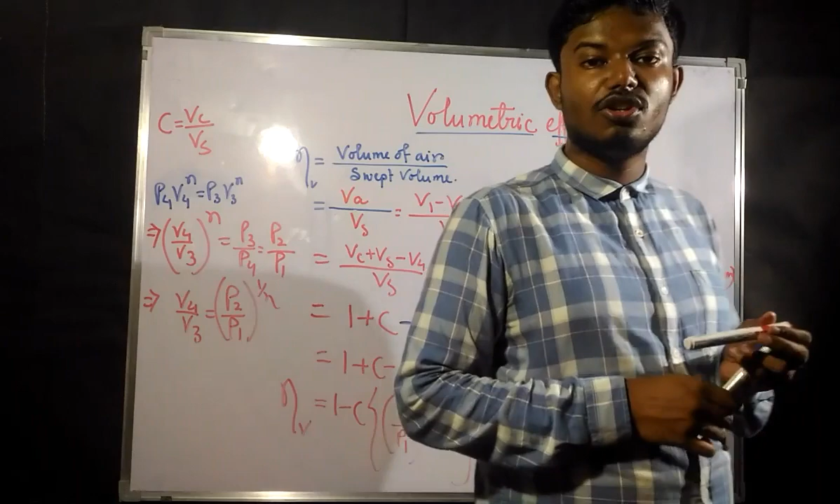Now from here you can see when C increases, this part is increasing and it is subtracted from 1. That means if this increases, a large part of this will get subtracted from 1, and the final efficiency would decrease.

It is same like when you have written 1 minus 0.5, this gives you a value of 0.5. But with the increase of C, let us say that 0.5 is now increasing to 0.75, so the final result would be 0.25.

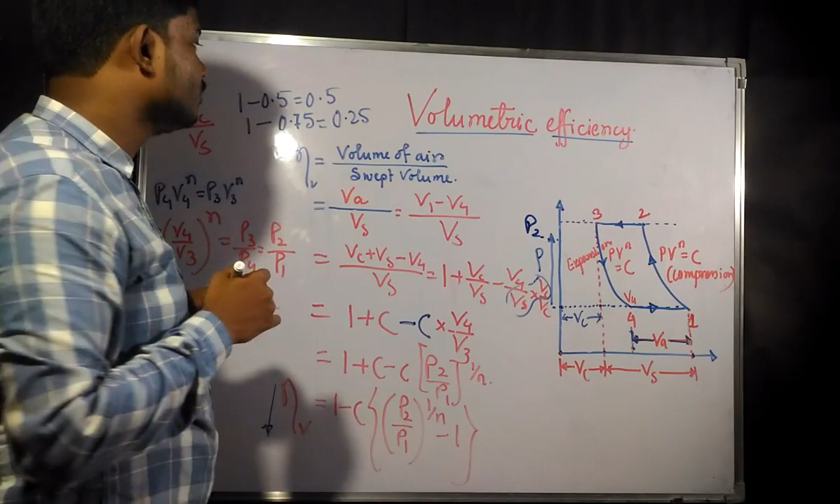That means this thing is going to get decreased, similarly efficiency is going to get decreased. So that means C is increasing means this VC is increasing, and VC increasing means the clearance volume is increasing.

Now with respect to a certain swept volume, if the clearance volume is increasing, or you can say the clearance volume is same but the swept volume is decreasing, that means with the increase of clearance volume or decrease of swept volume, this C is going to increase, and if C increases, the efficiency decreases.

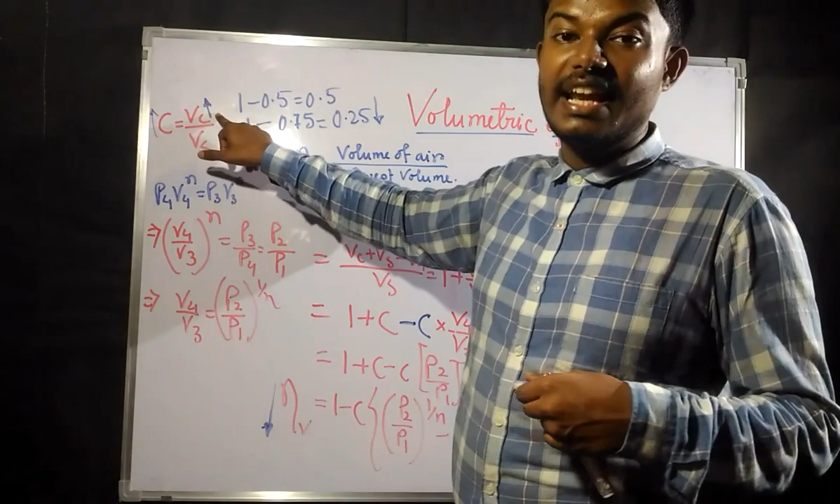Now if the swept volume is constant, with the increase of clearance volume, as I told earlier, we have proved here that C is going to increase, and if C increases, the efficiency gets decreased. The final thing is, if you increase the clearance volume, the efficiency would get hampered.

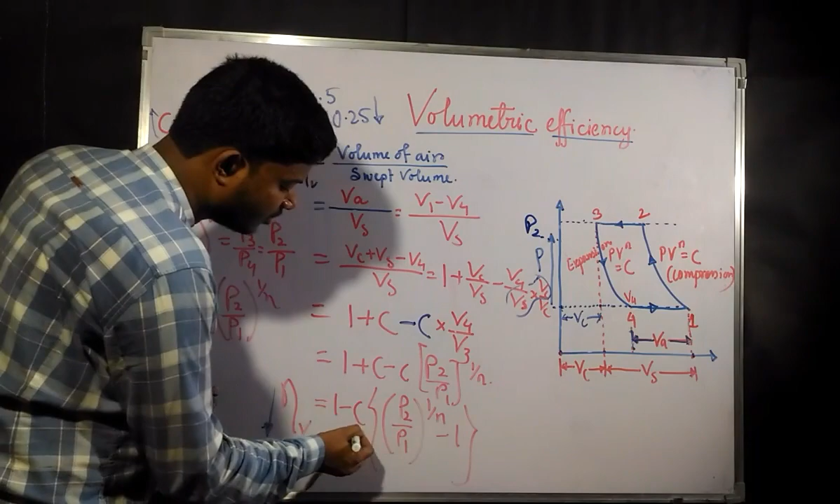Okay, now let us say C is going to be constant, and your P1 is also fixed. That means you are trying to compress a certain amount of air at certain pressure, so your initial pressure is always constant. Now it is up to you, up to which pressure you need to compress it.

So you can take air at 1 bar, and you can compress it up to 5 bar, 6 bar, 7 bar also, this is up to you. So if your P1 is constant, but you are constantly increasing the P2, that means the desired pressure. P2 is nothing but the desired pressure.

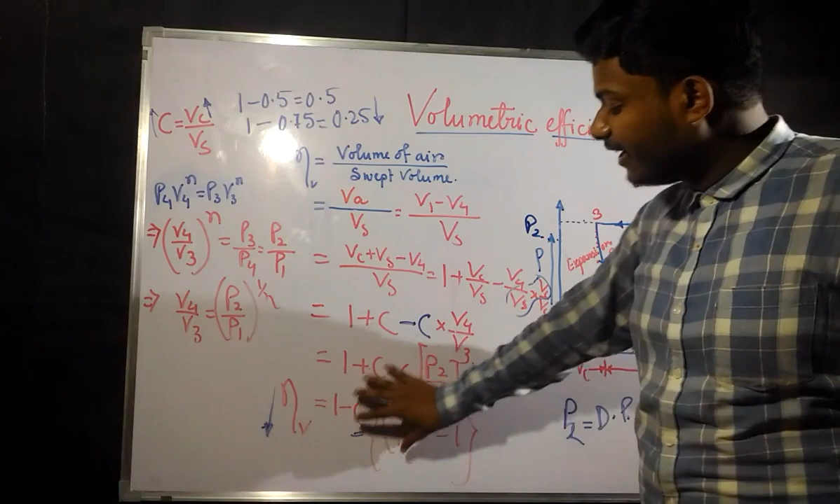Now if your desired pressure increases, this thing increases, and it is subtracting from 1, meaning the efficiency again gets decreased. So up to here, what is the conclusion? If the VC increases, efficiency decreases. If the P2 or the desired pressure increases, efficiency decreases.

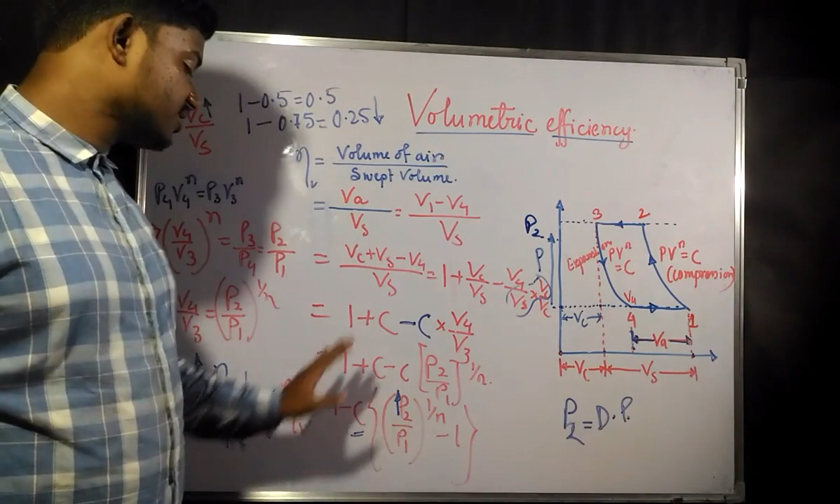So this is the final thing which we have found out from here, and this is going to be the expression for volumetric efficiency. If pressure 1, pressure 2 is given and the polytropic index is given, then you can easily find the volumetric efficiency, and these are the conditions which we have found out.

And we have also seen that for a compressor where the clearance volume is not there, in such cases the volumetric efficiency, you can say, is going to be an ideal case where the efficiency is 100%, but that is impractical. It is not possible to construct a compressor where the clearance volume is not there.